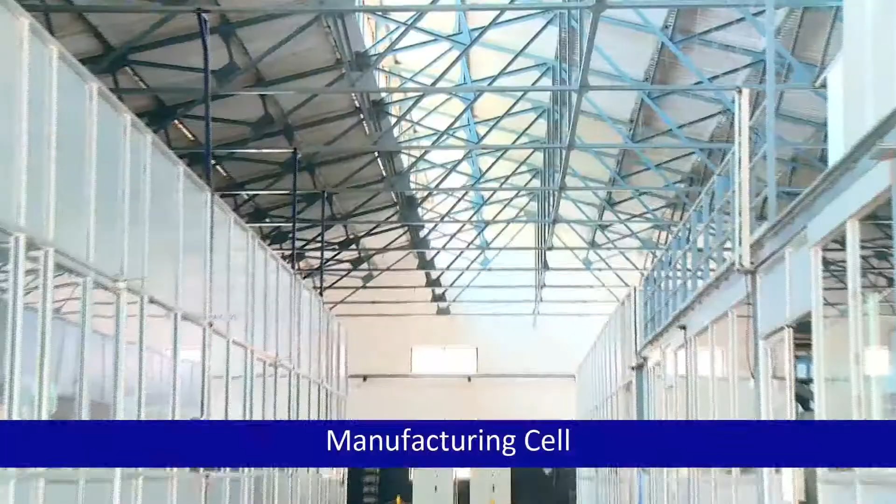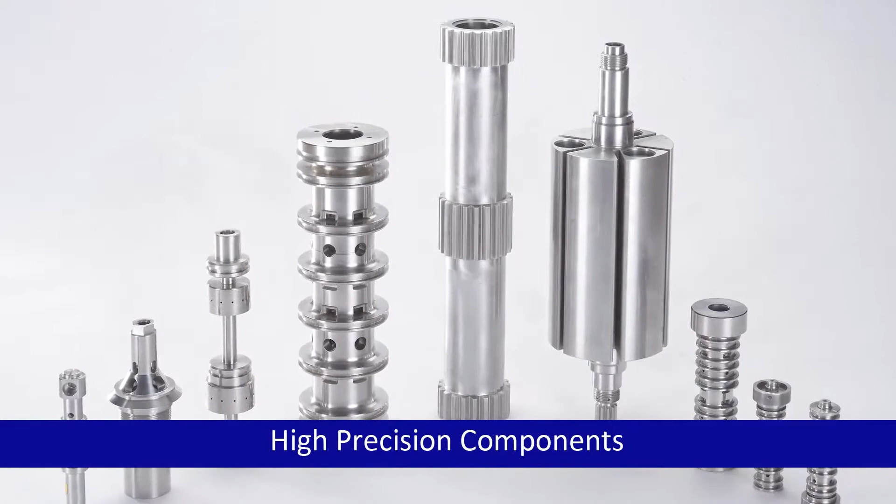Since its inception, ATC is the trusted partner for ISRO in all the PSLV, GSLV, Chandrayaan, and Mangalyaan missions, and a feather in our association is working for the prestigious India Maiden Human Space Program, Gaganyaan.

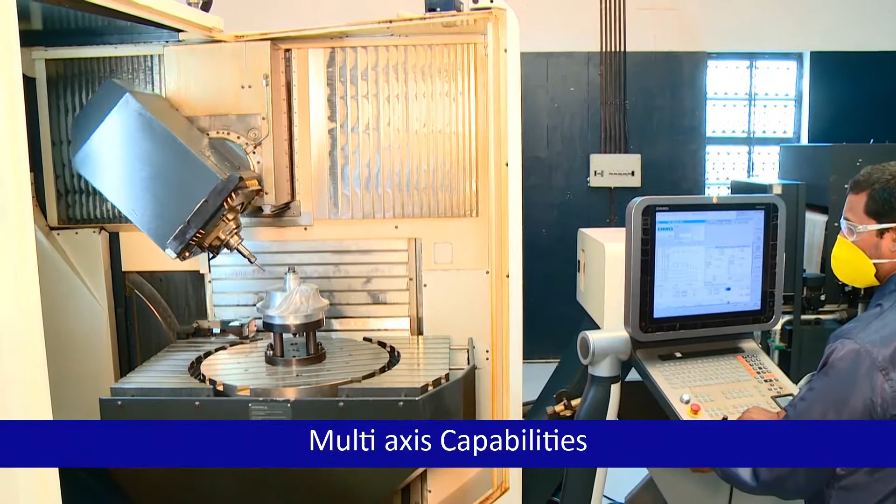Established in manufacture, special process, assembly and testing to produce motors, actuators, control valves, sensors, solenoids, and power takeoff shafts.

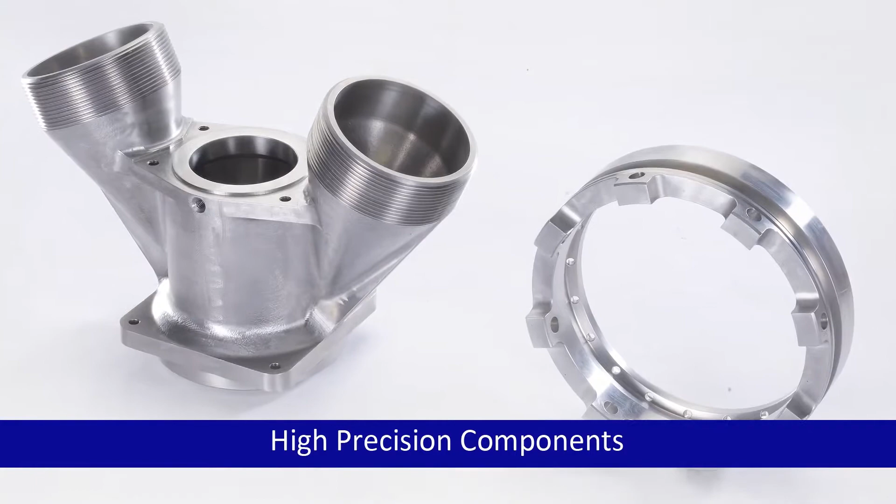The latest venture into manufacture of gimbals for electro-optic payloads and retractable landing gear systems for UAVs sets a path to become a system integrator.

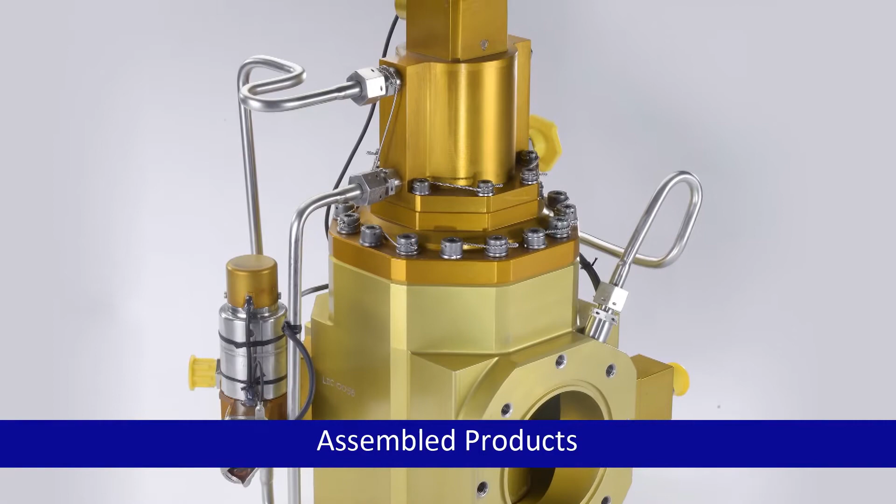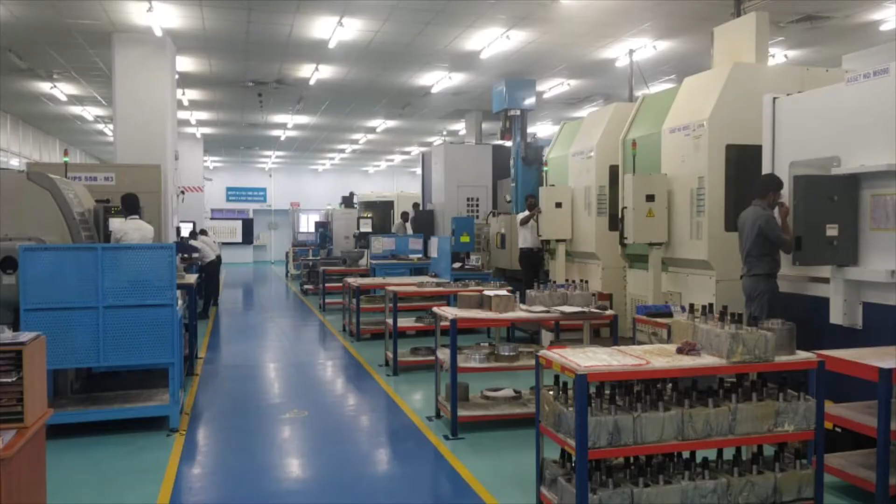In 2010, LMW ventured into the aerospace industry, leading to the birth of a new division, Advanced Technology Centre, a one-stop solution for the aerospace sector meeting world-class standards on quality assurance, certified by international quality agencies.

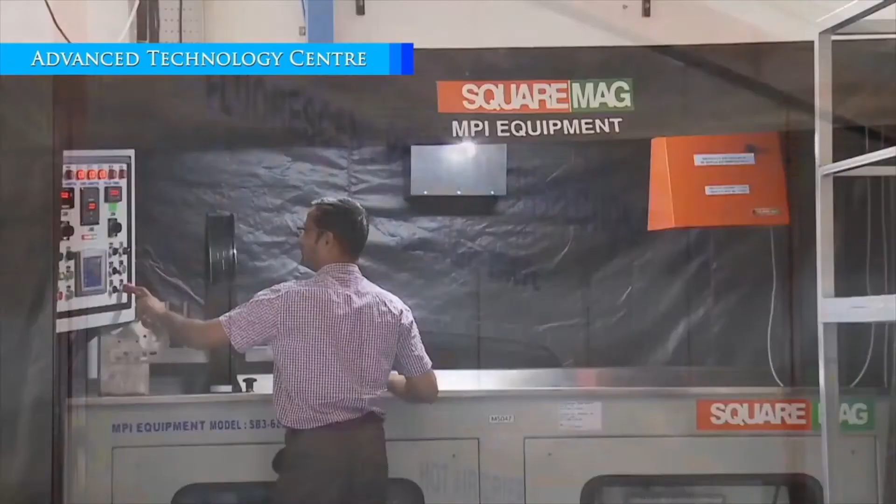Serving the aerospace and aviation industry, manufacturing precision machine parts for engine, structural, sheet metal components and sub-assemblies, with a valuable special process for surface treatment.

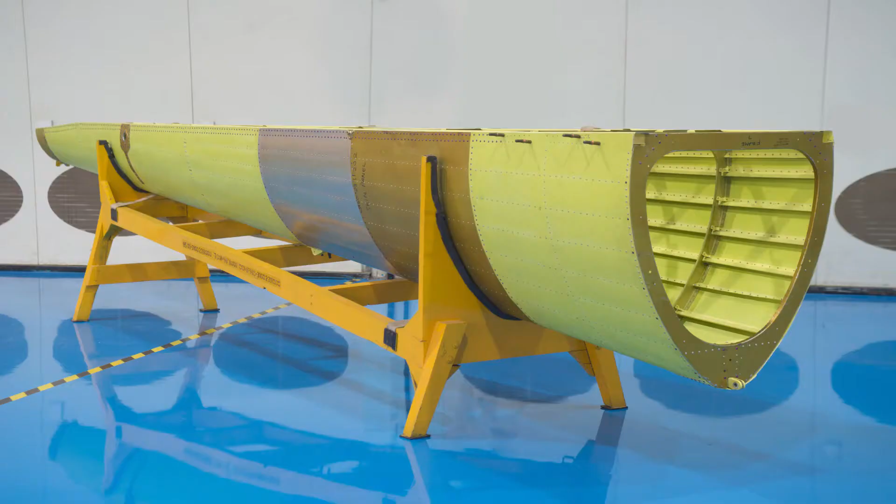LMW is progressing in its foray into aerospace by establishing a vertical for composites at its Advanced Technology Centre to complement the manufacturing infrastructure for metallics.

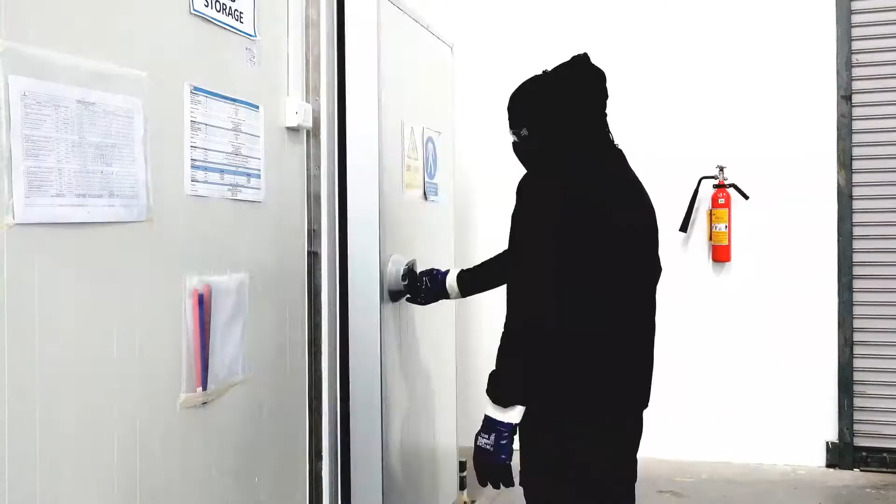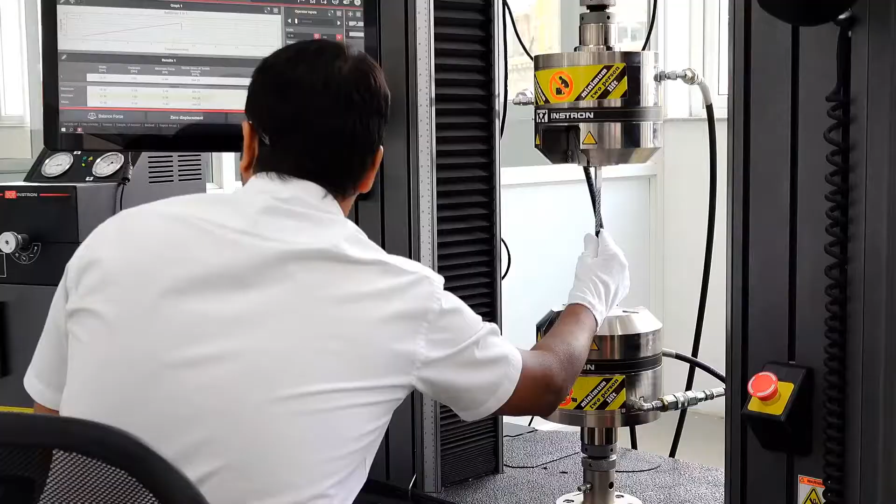The perfectly integrated state-of-the-art facility will put LMW in the Premier League to design, develop, analyze, qualify and manufacture very demanding aerospace composite structures. A unified approach to build the facility, a competent team and an effective quality management system has

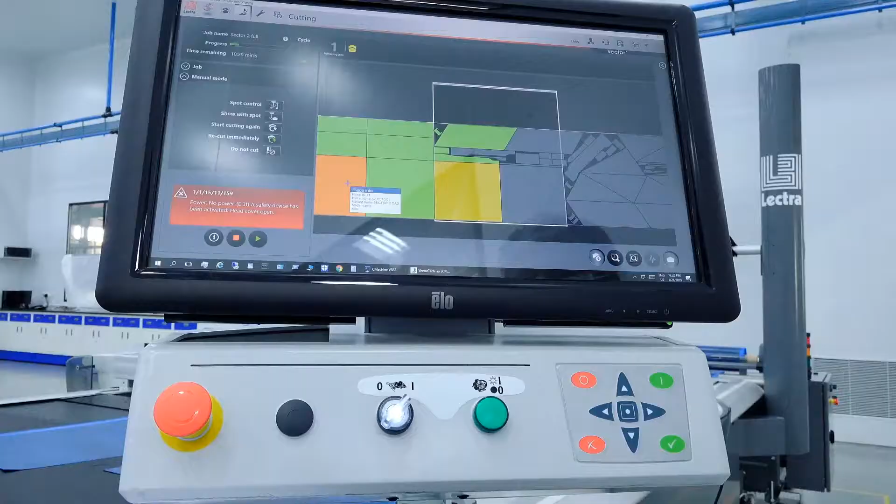amalgamated all the requirements to bring forth an ideal environment and work culture to meet the expectations of AS 9100 and NADCAP standards.

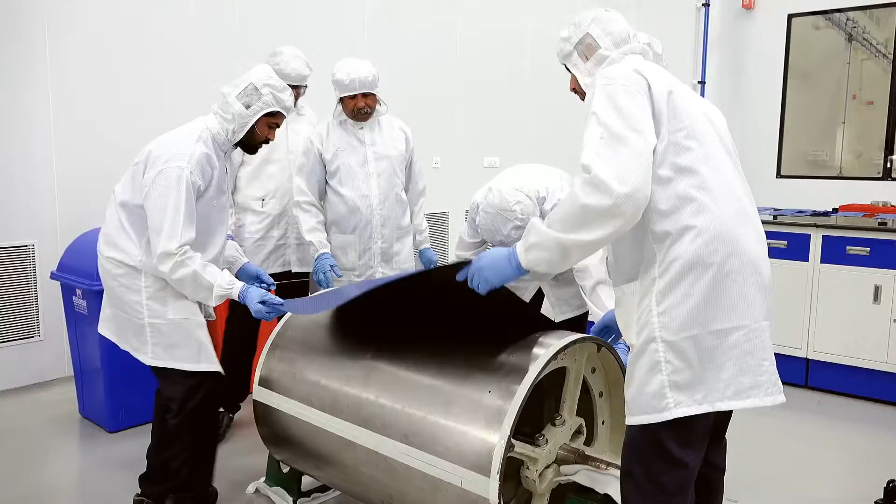A CNC pre-preg cutting machine is deployed to prepare the layup kits. Two clean rooms of ISO Class 8, one of which is convertible to Class 7, are maintained in ideal conditions for layup activities.

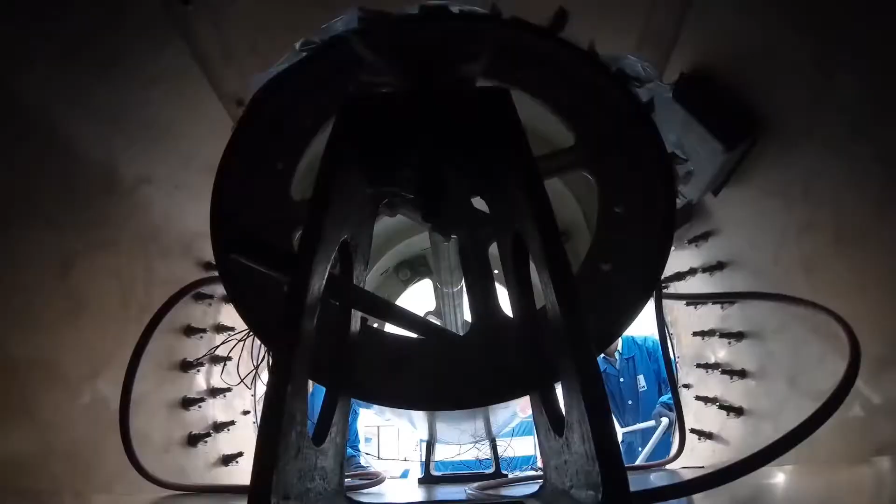Two autoclaves with computerized control systems will assure precise execution of curing cycles.

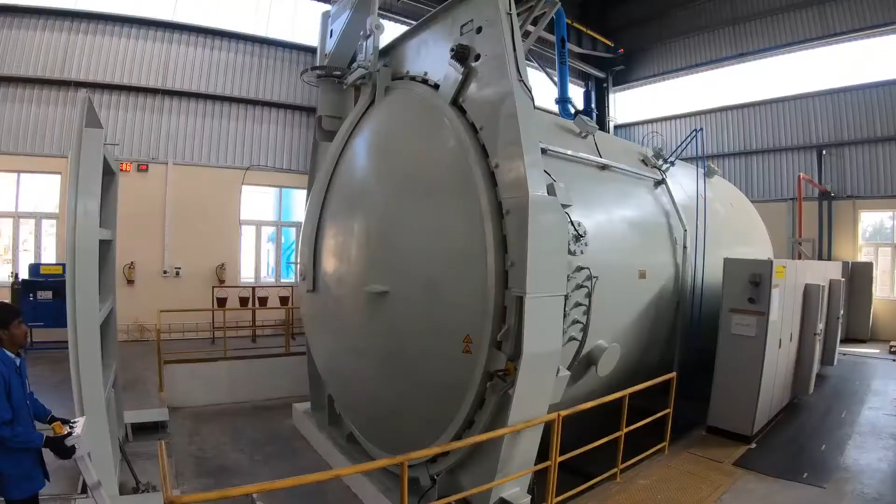A universal testing machine of 100 kN capacity and an ultrasonic A-scan form part of the quality monitoring activity.

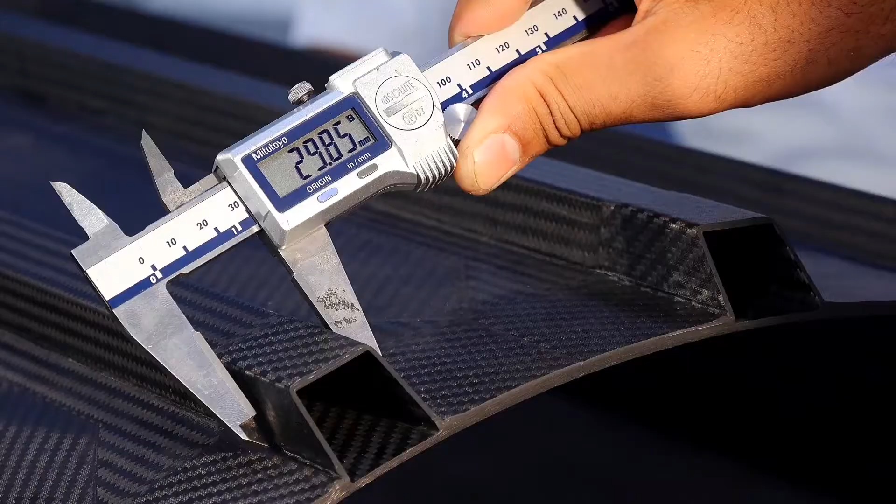The facility has a high bay for assembly of large composite structures for launch vehicles and aircraft.

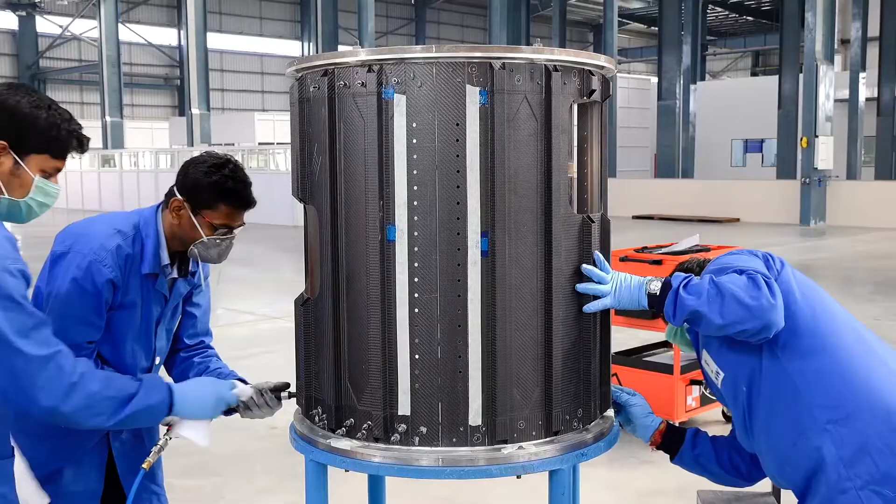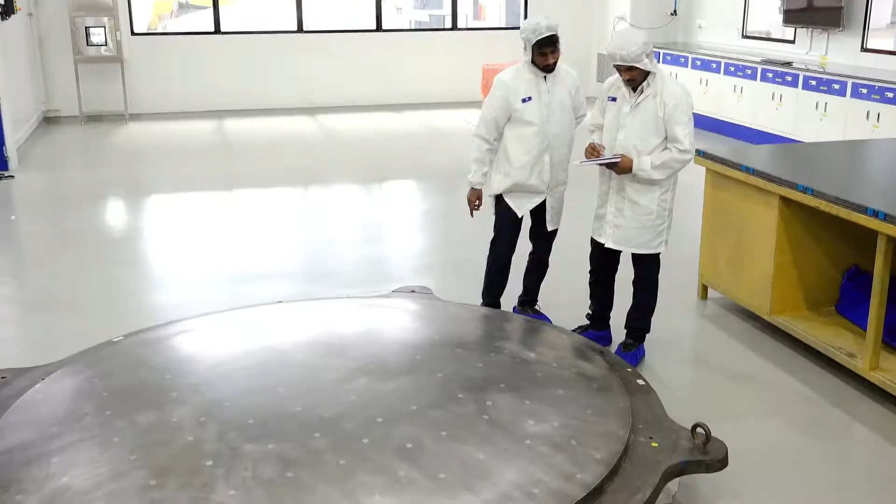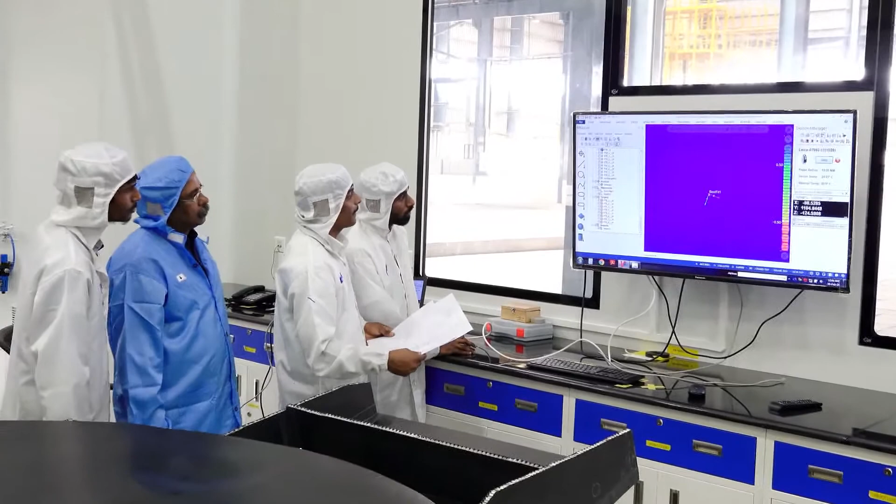The team has shown its potential by realizing diverse and demanding composite products. Notable among them is a deployable CFRP-shaped antenna reflector for a communication satellite, requiring high profile accuracy and stability under thermal and inertial loads. Translating crucial design aspects into product and methods to achieve and measure profile accuracy has been mastered by the team. The dish is of sandwich construction.

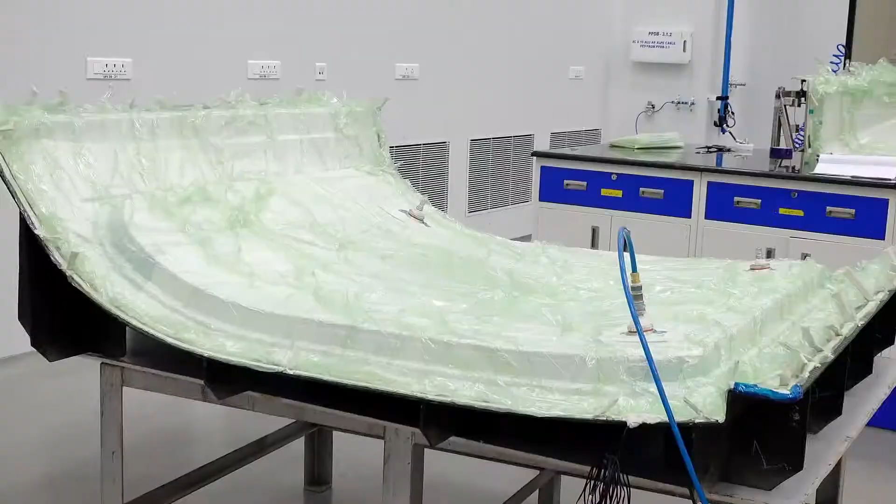Hindustan Aeronautics Limited, the premier organization in India to build aircraft and helicopters, has engaged LMW to produce complex and intricate contoured structural components for its advanced light helicopter.

These components are processed in a well-controlled environment by the vacuum bag molding method and subsequently cured in an autoclave. One of the typical components is the cowling panel assembly top engine, a partially sandwich construction.

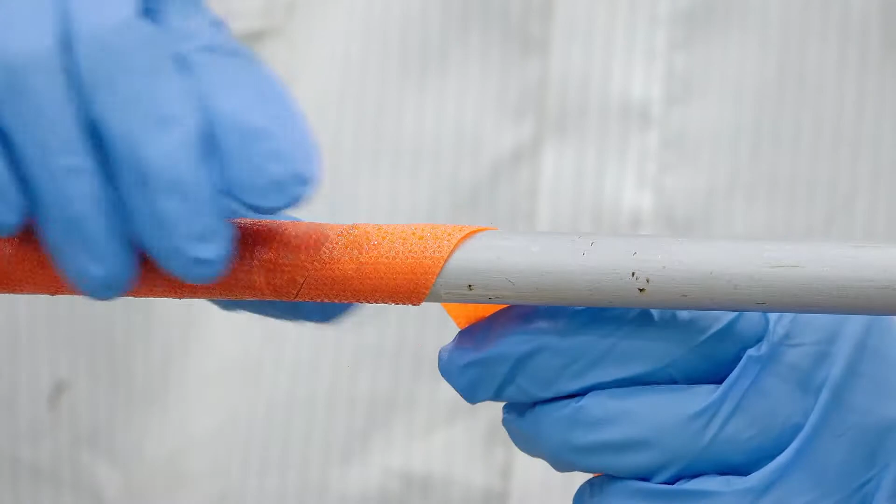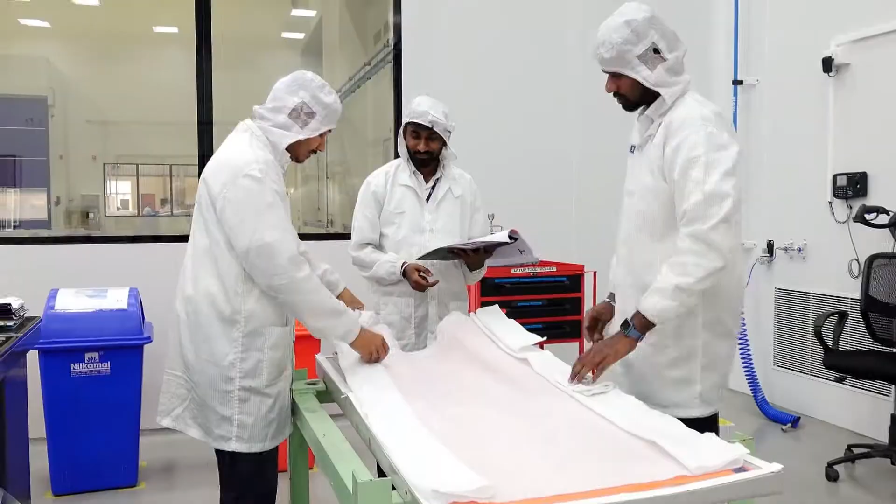Other typical components are the seal support for the door assembly and the cowling panel, which is again a combination of sandwich and monolithic construction. Concurrent with the processing of such components, test laminates are also processed to extract control coupons and verify the quality of processed components.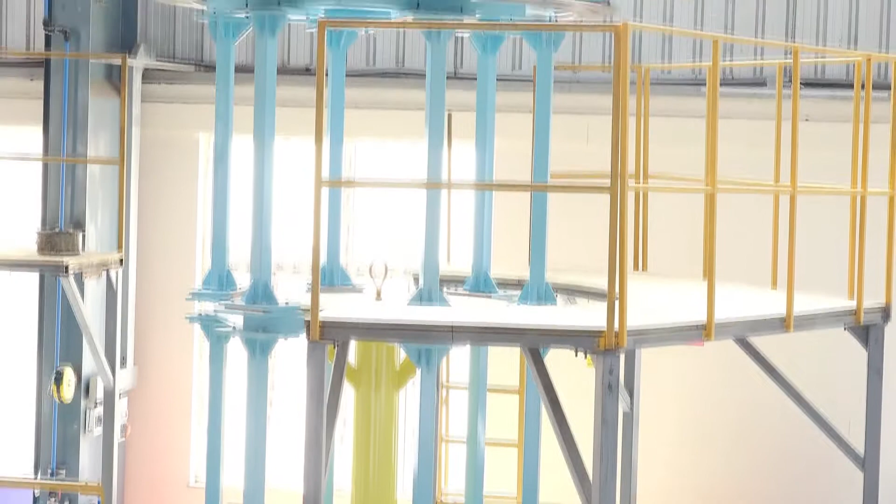The metallic sandwich cylinder for the small satellite launch vehicle is being developed for ISRO. The panels of the shell, using thin aluminium sheet as skin and aluminium alloy honeycomb core, have been molded and cured with due surface treatment.

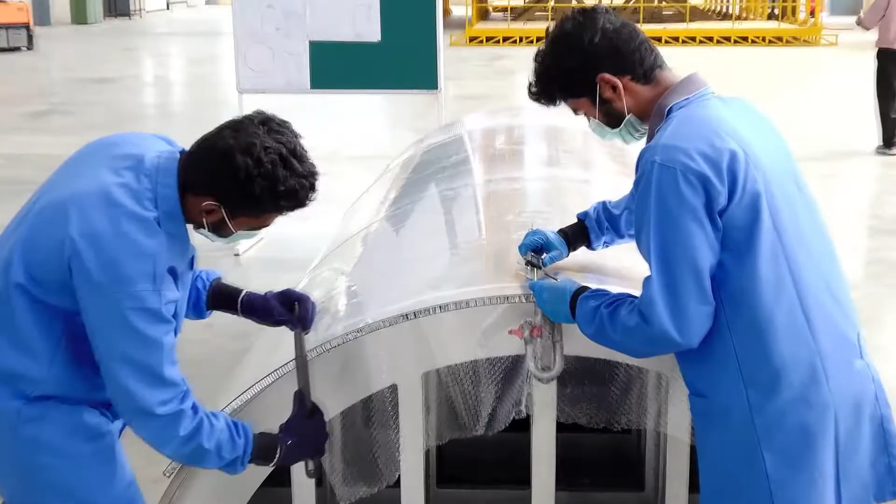Segmented cylindrical panels are subjected to non-destructive evaluation and trimmed to suit the assembly. The assembly has been realized with splices connecting the cylindrical segments being fastened together.

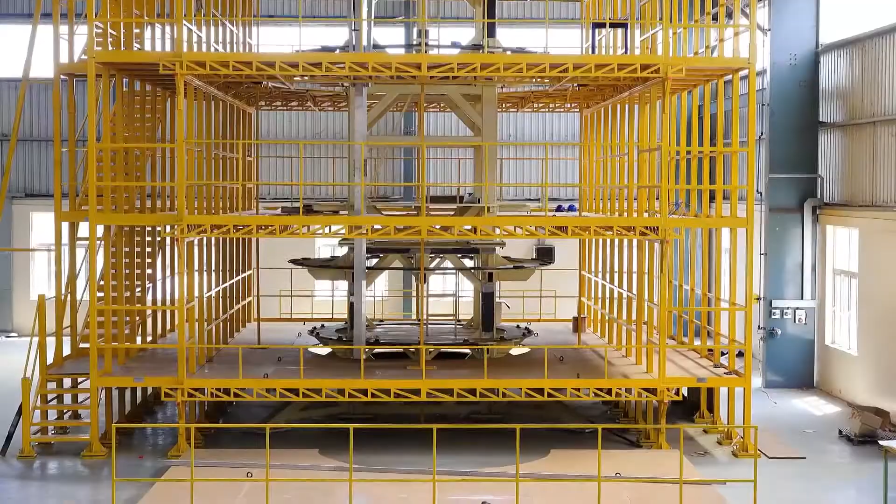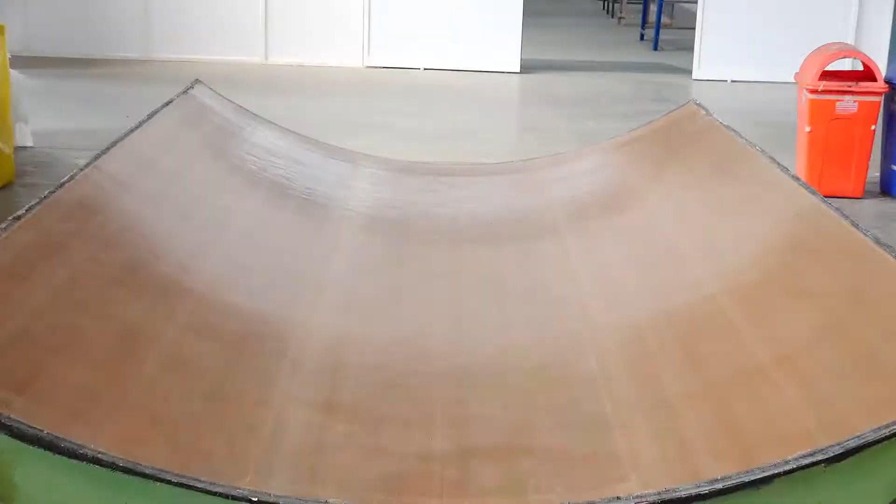Another major highlight of the current activities at LMW is the realization of the composite payload fairing for GSLV Mk3, India's largest launch vehicle. This activity involves design and manufacturing of composite toolings, the processing of sandwich panels of different configurations, and their assembly into two halves of the payload.

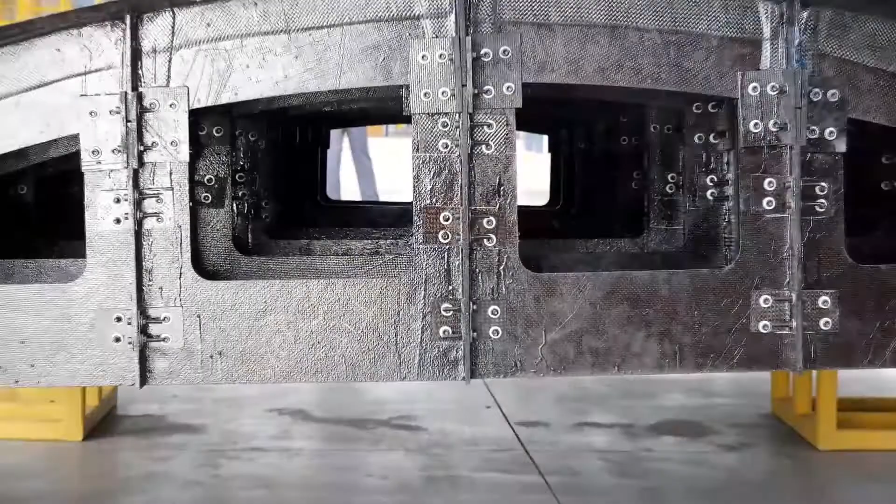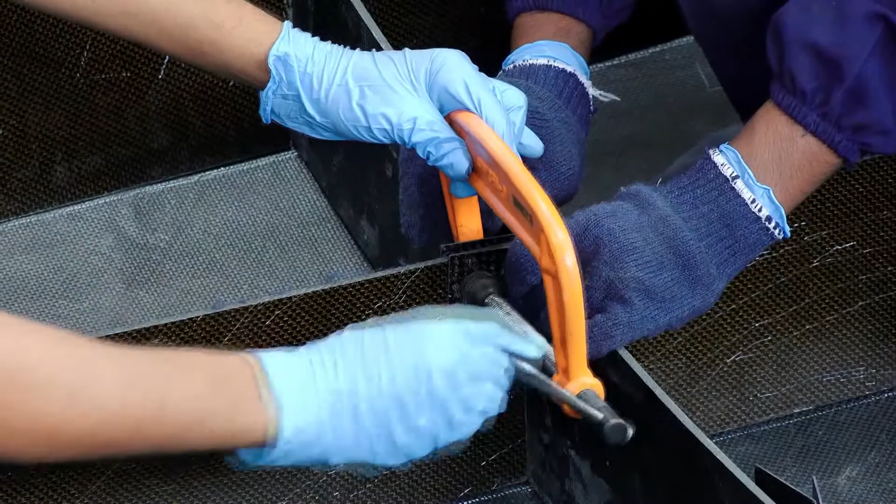The composite tools for realization of panels for the cylindrical segment of the CPLF have been realized in-house and inspected for surface accuracy. Similarly, the composite layup tool for the ogive segments of CPLF is also being built up in composites. The panels realized using these layup tools will be trimmed and assembled as payload fairings using

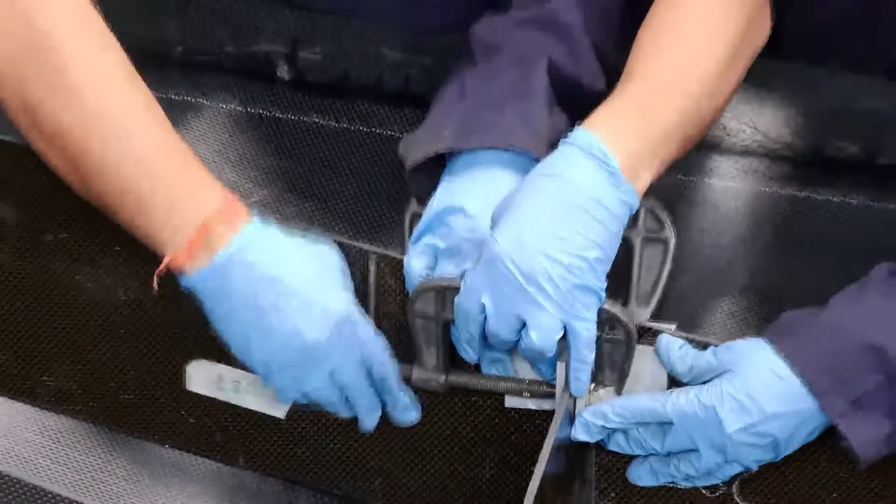the assembly jig. The diversity and complexity of the products being realized at LMW has raised expectations of potential customers. The facility will be further augmented by installation of a hot air oven, CNC machining center,

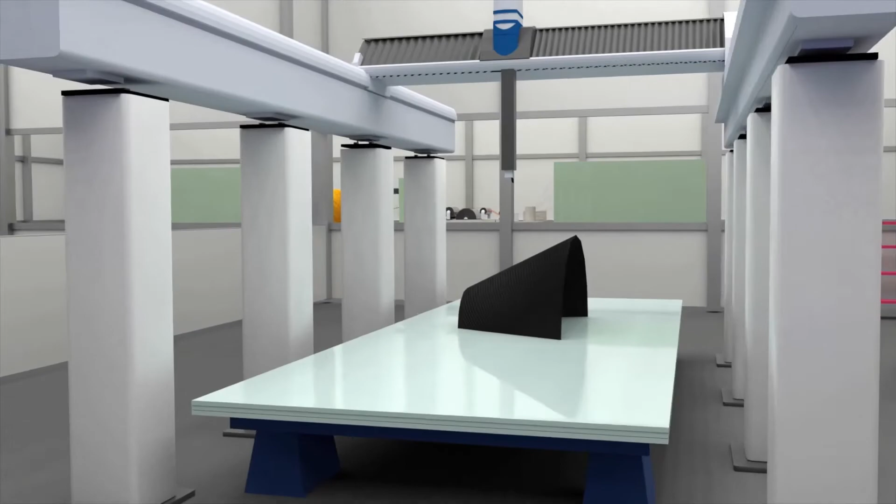CNC 3D CMM, and a C-scan system for NDT to meet the rising demands and expectations of customers. Filament winding is identified for expansion of composite processing capability, and fiber placement is envisaged as a futuristic growth path.

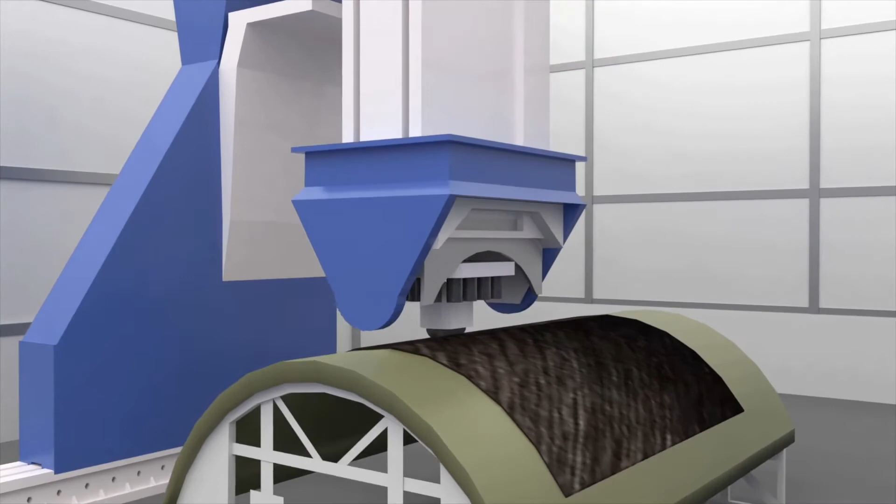Well-streamlined operating procedures are implemented right from raw material acceptance to final product acceptance. Real-time data logging will ensure comprehensive product history and traceability.

LMW is determined to evolve as a key player in the aerospace composites arena with its characteristic business ethics and customer orientation.